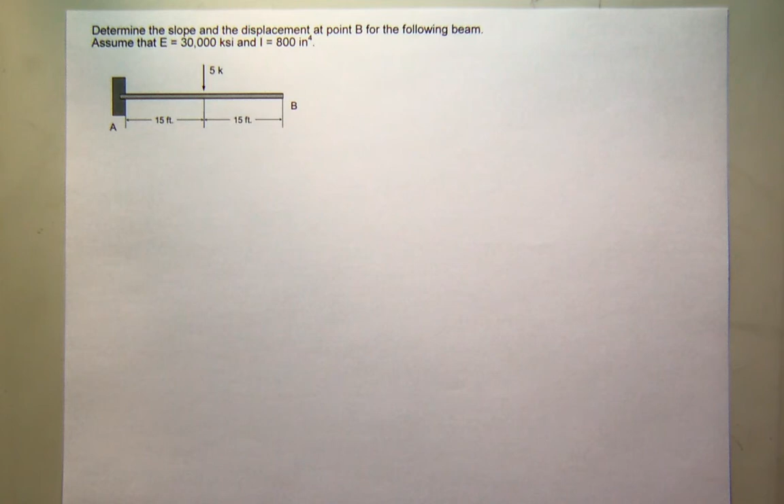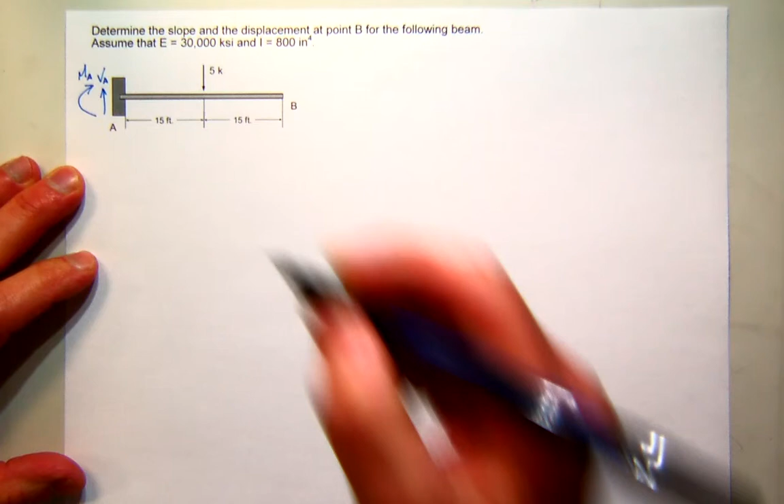So let's start. I don't usually like to do it this way, but I will anyway to save some paper. I'm going to assume that I've got shear at A and moment at A. And let's find those reactions.

So using right-hand rule, I'm going to sum the moments at A, make sure they're in equilibrium. So let's sum the moments at A. What do we have? Well, we have the actual moment that I'm looking for, which in my sign convention would be negative. And then there's only one load on the whole system, this 5 kip force at a distance of 15 feet away, and that also creates negative moment. So 5 kips times 15 feet. So it looks like the moment at A is negative 75 kip feet.

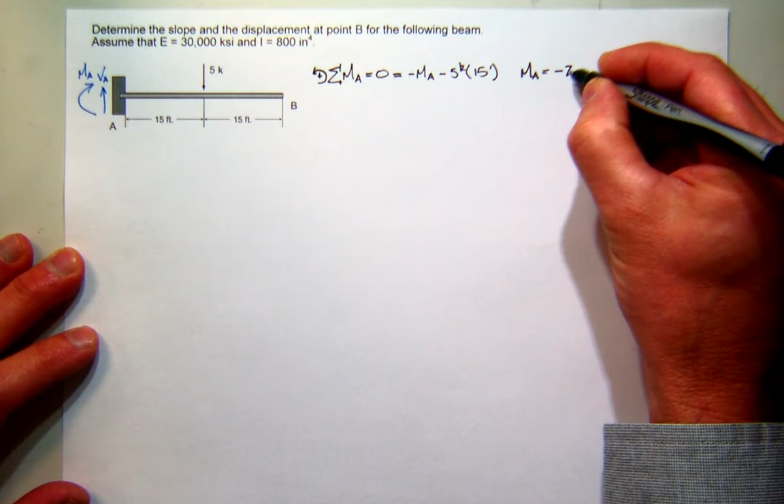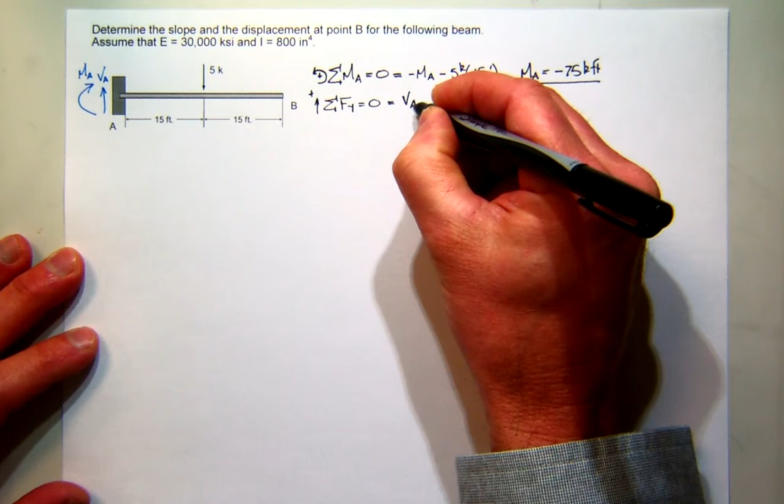That seem okay? So let's then go ahead and sum the forces in the y direction. We'll assume up is positive. So I have my shear force is up and the 5 kip load is down. So it looks like the shear at A is 5 kips.

So what's the moment look like? Well, if I kind of draw a template for my shear moment diagram, we'll start off with my shear diagram with the units of kips. So what's the shear at A? It's 5. Everybody see that? So that means we're going to start here at 5.

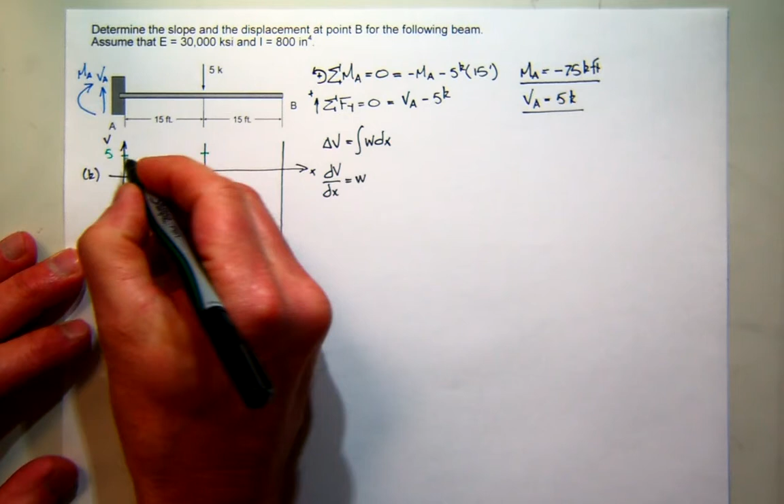Remember, the change in shear is equal to the area under the load diagram. And what's the area in the load diagram from 0 to 15? Nothing. So there's no change, we stay at 5 kips. And we also know that the slope of the shear diagram is equal to the load. What's the value of the load here? 0, so I have 0 slope. So I have a constant shear of 5 kips over the first 15 feet.

Now I'll draw positive x and positive M axes for my moment. Now what's the bending moment at A? We saw that it was negative 75. And we also know that the change in moment is equal to the area under the shear diagram. So over these first 15 feet, what's the area under our shear diagram? Well, it looks like 5 times 15, it's a rectangle, that's positive 75.

So if I start at negative 75, I end up at 0. And the slope of the moment diagram is equal to the shear. Our shear is constant, positive, and equal to 5, so we have a constant positive slope. So there's our moment diagram. Again, you'd be very happy if you got that on the exam as a shear moment diagram problem. But unfortunately for us, that's about a third of the way through this problem.

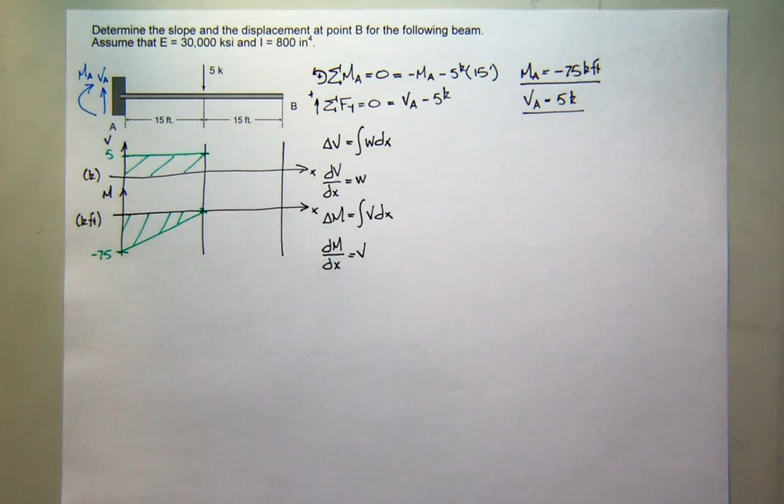So, what do we do next? We need to do the conjugate beam. So I'm going to try to get this all on one piece of paper, so let me box this off. And then I'll start over here and let's draw the conjugate beam.

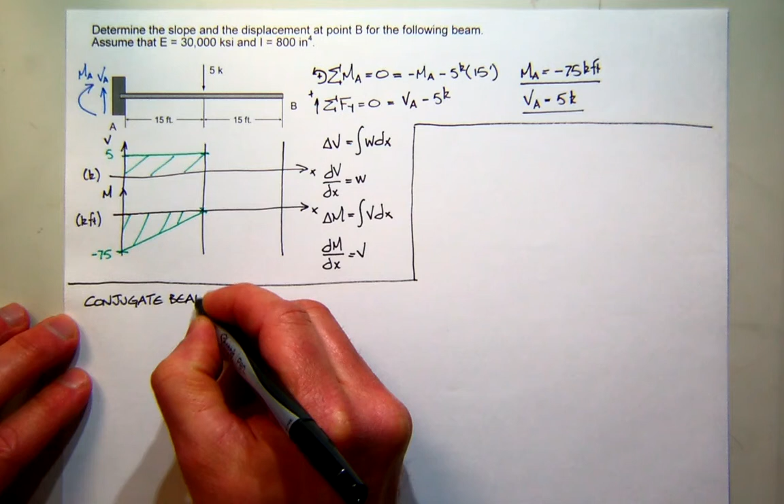Okay, so when we draw our conjugate beam, we map the real connections into the conjugate beam. So a fixed connection in the real beam maps to what in the conjugate beam? A free end. And the free end maps to a fixed end. So our conjugate beam then ends up looking like this. Everybody see that?

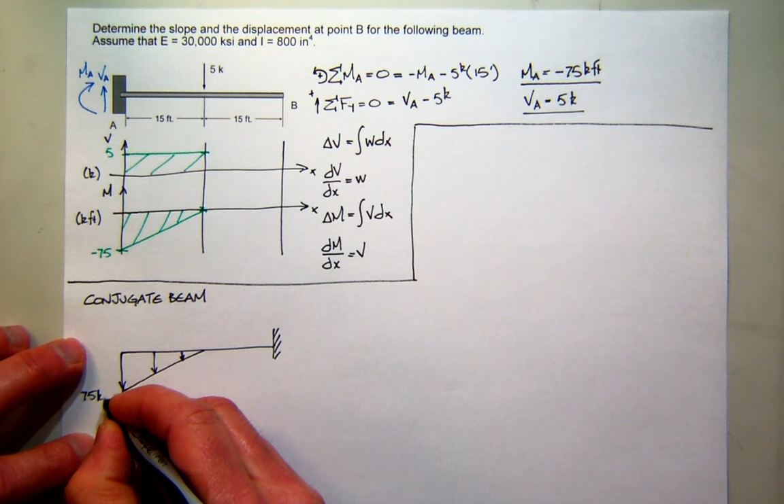Now, what do we apply as load to the conjugate beam? Well, the M over EI diagram. And M is negative, so we're going to apply it as a negative load. Negative load is down, so we're going to have a load that looks something like this. And that will have a value of 75 kip feet divided by EI, over 15 feet, and this will be 15 feet. Everybody see that?

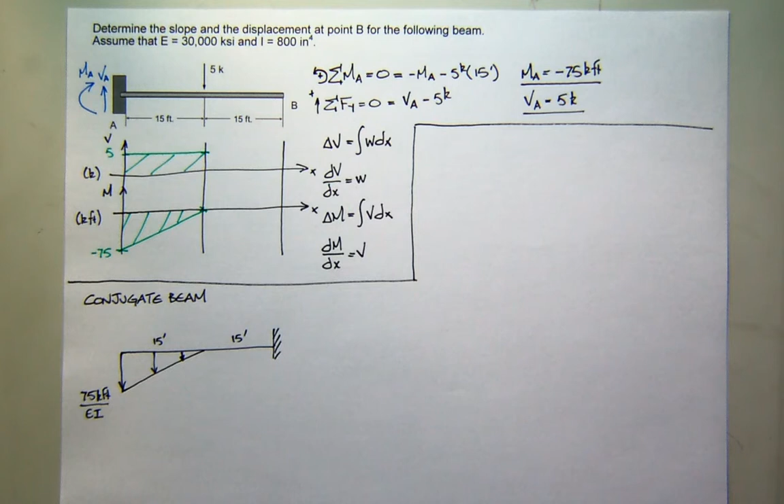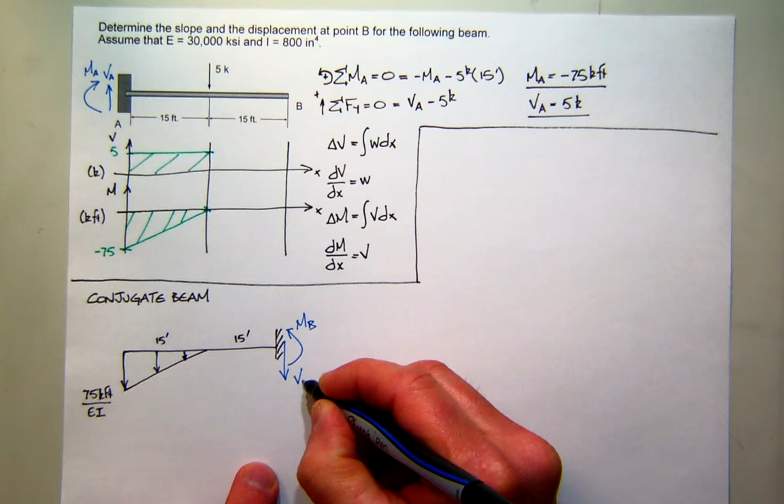So, the problem asked is, what's the slope and displacement at point B? Well, point B is the free end. So to find the slope we need to find the shear and moment at B in the conjugate beam. Now the shear and moment at this point is simply just the reactions. So I'm going to come down here and I'm going to assume positive direction for the moment at B and positive shear for B. I just need to solve for those two things.

So you can probably see one way to easily handle this would be to convert this into a concentrated equivalent force. I'll call it F1. F1 would be 1/2 the base, which is 15, times the height, which is 75 kip feet, over EI.

Can somebody calculate that for me? And while they're doing that, we'll go ahead and find this distance. Well, we know in a triangle that the centroid is 2/3 from the small end, so 2/3 of 15 is 10 feet, and then all the way over to this side would be an additional 15.

So somebody get that value? What is it? I say it's 450, I'm guessing. 562.5 kip feet squared over EI.

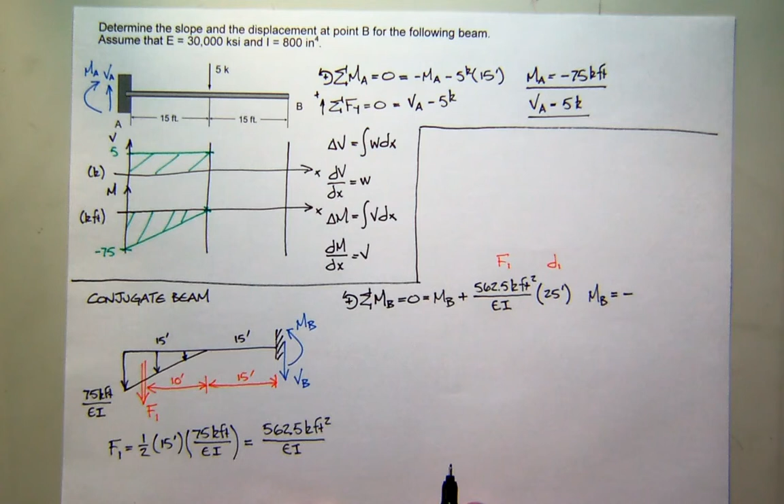So what is the moment at B? Looks like it's negative, and whatever that times 25 is. What'd you get? 42? I don't think it's 42. 562.5 times 25? 14,062.5, and that would be kip feet cubed over EI.

And it's negative, so that means the displacement in the real beam is negative. Does that make sense, that B would go down? Yep, I think so. So let's actually compute the value. We know that the moment in B really maps to the displacement in B, and that would equal negative 14,062.5 kip feet cubed.

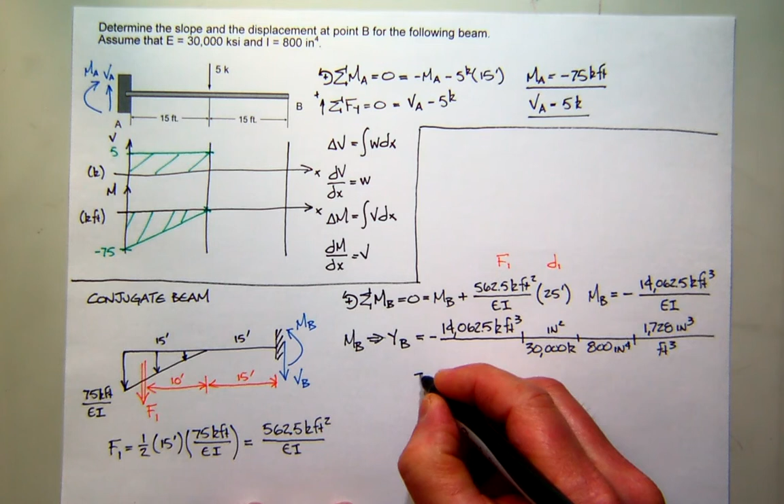Let's divide that by E, which is 30,000 kips per inch squared, and then 800 inches to the fourth. And we're going to say that there's 1728 cubic inches in a cubic foot. Everybody see that? So all the units should cancel out, and we should get... close to 1 inch, I'm guessing. Actually, a little more than 1 inch.

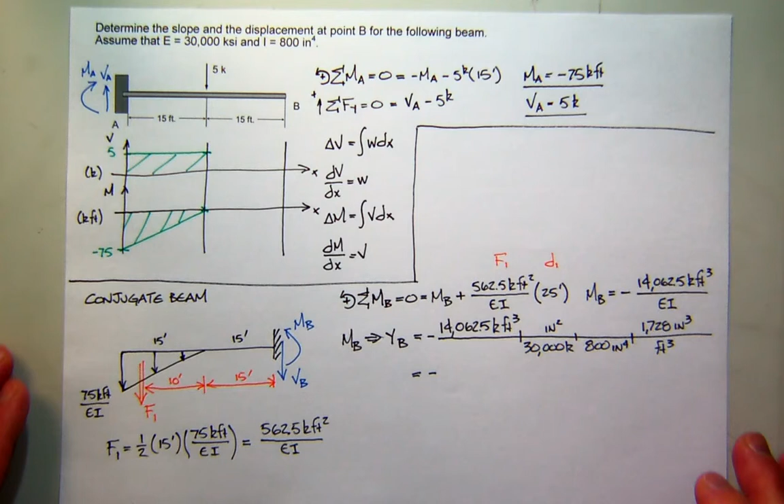What's the answer? 1.01 is close enough for me, and that's in inches. 1 inch.

What about the slope? Well, we get the slope by summing the forces in the conjugate beam and solving for shear. So let's do that. I've got the shear force acting down minus my force, which is 562.5 kip feet squared over EI. It looks like the shear in B is also negative, and that's not hard to compute. It's just 562.5 kip feet squared over EI.

But we know that the shear in B really maps to the slope at B. So what is that slope? Well, we have to do the calculation again. So it's 562.5 kip feet squared. Again, we're going to divide by E, which is 30,000 kips per inch squared. The moment of inertia of our cross section is 800 inches to the fourth.

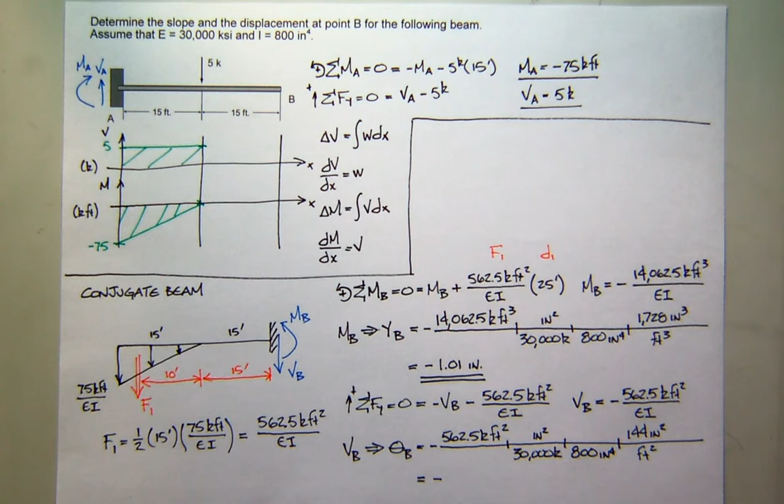And now we have to convert to square inches, not cubic inches. So there'll be 144 square inches in a square foot. And if you look at that carefully, you'll see it has no units — all the units cancel out. I think we get a very, very small number. What is it? 0.00337. Okay, wait, here we go, hang on a second. 0.003? That's close enough. So that's 0.00-whatever radians.

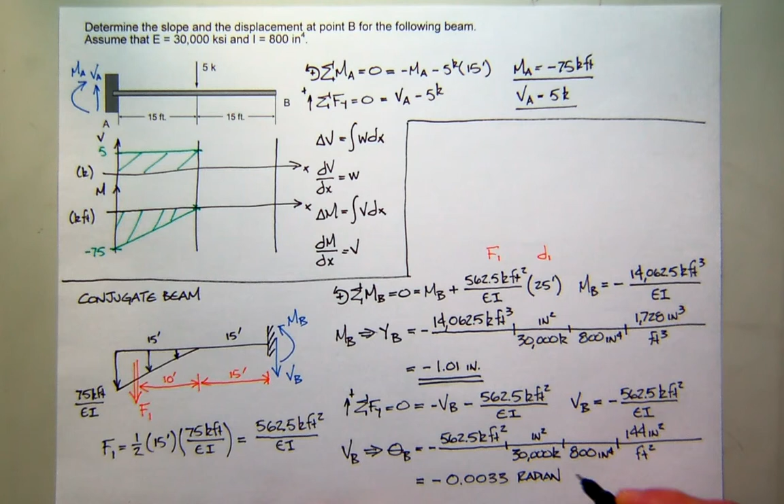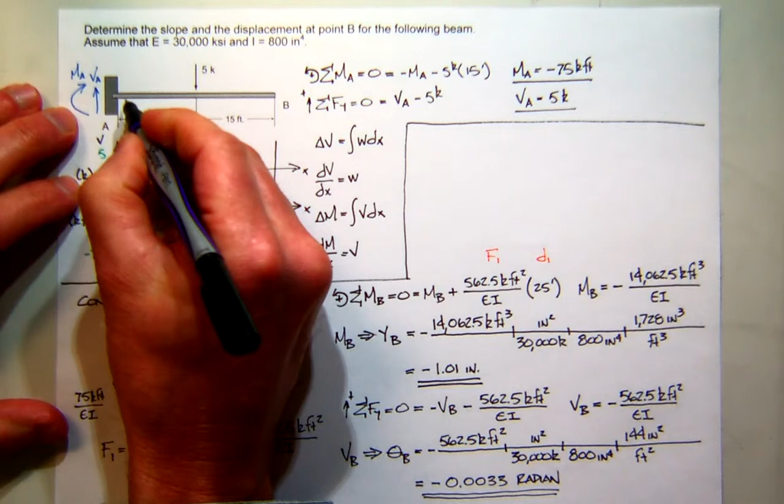Very small angle, as you can see. Also, you'll notice that it's negative. Is that true? I think so, because if you go back and look at the original problem, you probably expect it to deflect something like this, and you can see the displacement is down, and you can also see the slope is negative. So that seems to match pretty well.

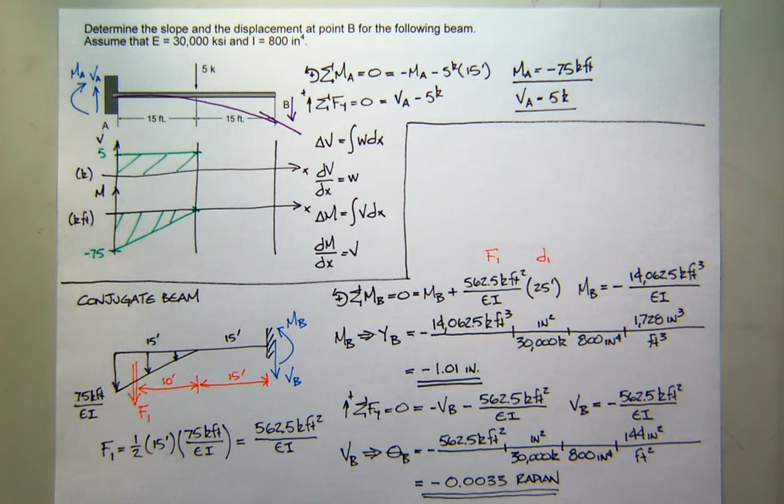So that's a very, very doable problem. Now, the advantage is that it was not hard — it relied on your skills of knowing shear and moment diagrams and being able to calculate shear and moment at a point, both skills that you should have. What's the disadvantage? You don't get an equation, right? I just solved for it at a point. So if I wanted to know it at other points, I'd have to redo the problem.

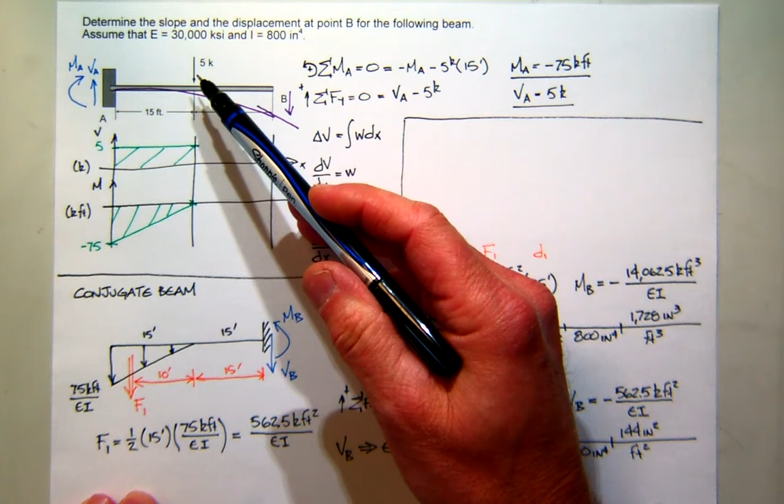So it does have an advantage in that it can give you a value at a point relatively quickly, even for fairly complicated sections. The other thing to notice is, if your moment diagram starts to get quadratic or cubic or higher order, then this becomes more challenging. So this works great for point loads, because point loads usually generate triangular moments, which are not hard to deal with. So any number of point loads on a system, which could be very challenging to do with direct integration, works out very nicely with conjugate beam.

So any other questions before we end this one? No? Okay.